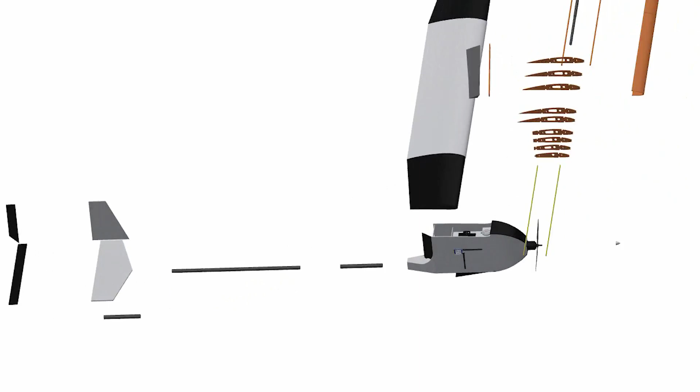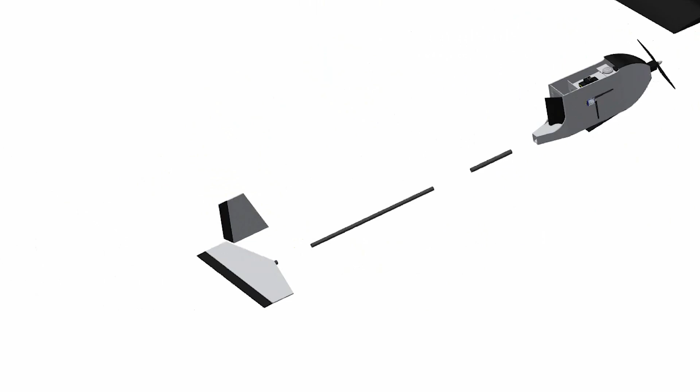We prefer the new tractor configuration rather than last year's pusher one because we took into consideration the speed of wind, as the suction of air coming from the propeller passes over the wing, which increases the speed of airflow for better lift during hand launch.

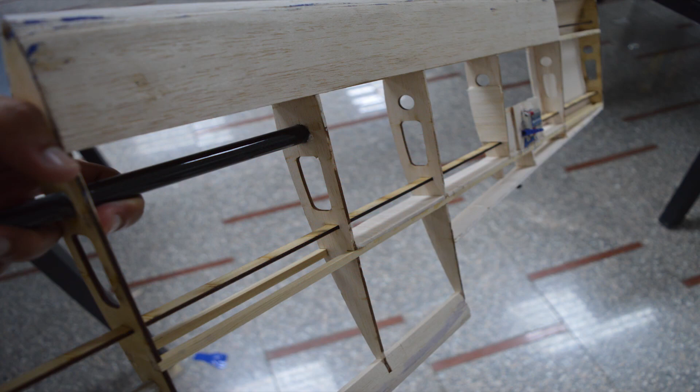During the manufacturing process, the team's main goal was to manufacture the airframe with highest quality and lowest cost, while being sustainable. The main material used is balsa wood and plywood, with super glue and epoxy used to fasten parts. This year, the wing consists of 3 parts for ease of transportation. The wing is made of a spar semi-monocoque structure, where the main spar is made of carbon fiber.

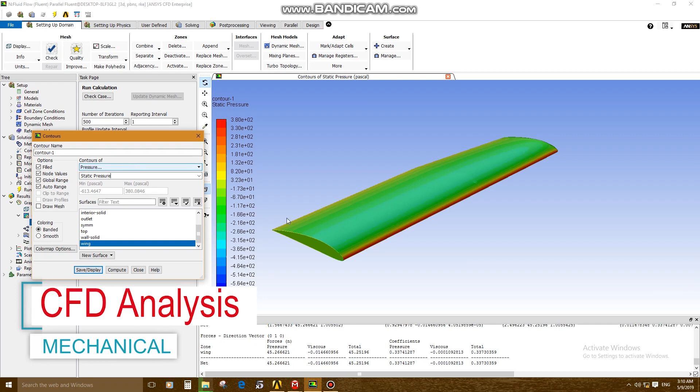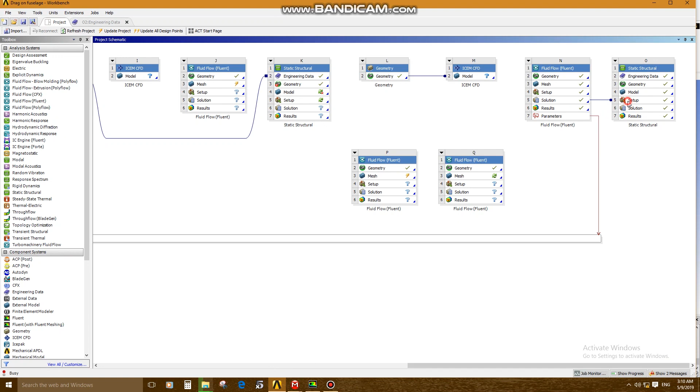Computational fluid dynamics simulations, CFD, were conducted on the half wing to get the results for dynamic and static pressure distributions. The overall lift force on the half wing is 45 newtons, equivalent to 90 newtons on the whole wing, with a lift coefficient of 0.337, which is reliable compared to the XFLR5 software value of 0.236. Finally, the load was imported from Fluent to Static Structural after adding sufficient materials, and the results showed that the wing withstands the load and is safe.

We designed our parachutes using Newton's law equations of motion and making some assumptions to get the net acting force on the parachute, as shown in this table.

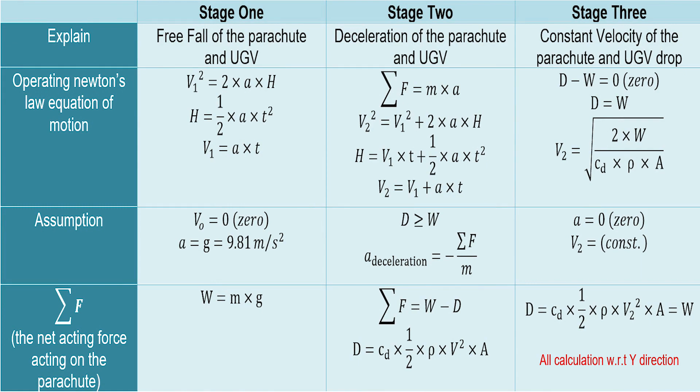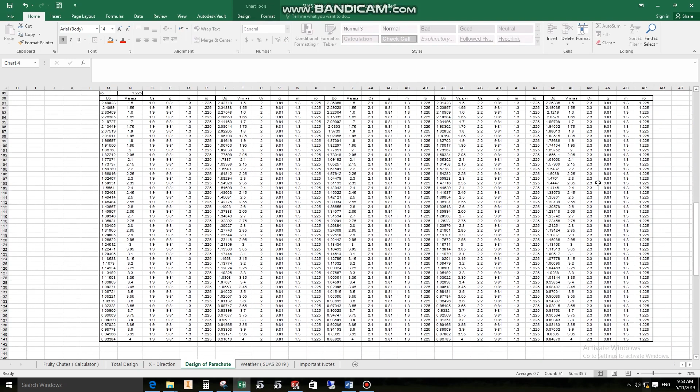Given the parameters of UAV speed, wind speed, altitude, and system delays to our Excel sheet, we got the specifications of the parachute and the optimal dropping time and distance, considered as input data for Pixhawk for their drop command.

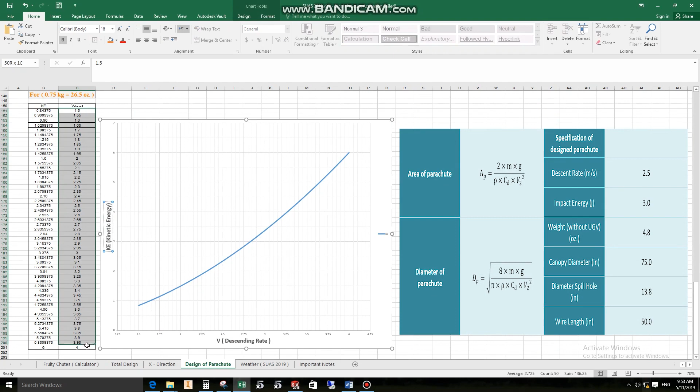A variety of parachutes from different materials and dimensions were designed and tested to choose the most suitable one.

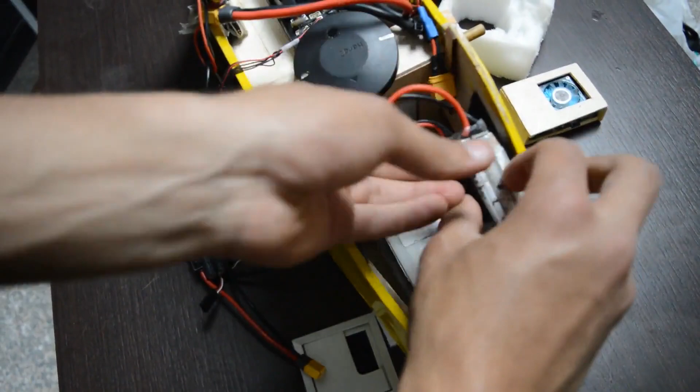For the entire system power supply, we use a 6-cell lithium polymer battery and another isolated 3-cell backup one for autopilot operation, with an electronic speed controller to control motor speed. For safety precautions, power is controlled using a safety switch.

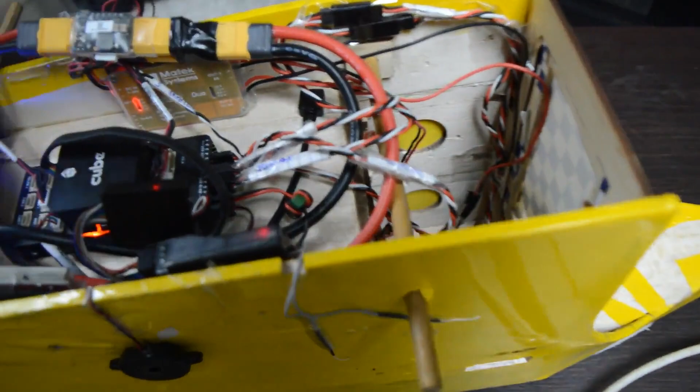We utilize the Pixhawk 2.1 autopilot with IMUs, FMU, and triple redundant sensors, including a GPS module for accurate navigation. The autopilot is calibrated using Mission Planner.

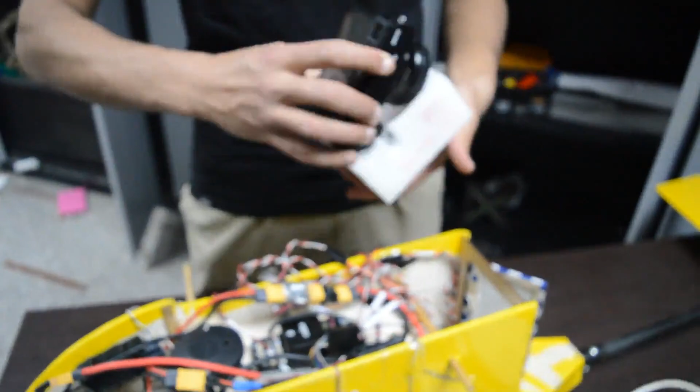We utilize a high-resolution camera, Sony Alpha 6000, which is fixed without gimbal usage, away from the motor to reduce vibrations. The camera is connected to an onboard computer, Odroid, used for image transfer.

Our communication system consists of three major channels. First, the Wi-Fi link, where images will be transferred to the ground station using a Bullet M5S transmitter and NanoStation as receiver, working on 5.8 GHz. The images are sent to ground station operators for manual and autonomous detection.

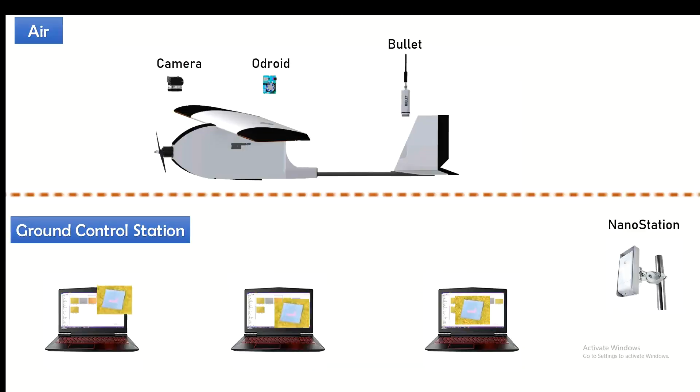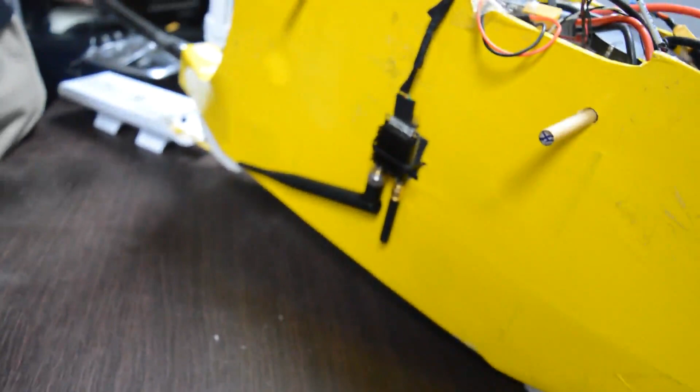Second, the pilot link, where the safety pilot can have manual takeover on the UAV using a Futaba radio control transmitter and Futaba receiver connected to the autopilot onboard, working on 2.4 GHz. Third, the autopilot link: data transmission is done using an RFD 900 telemetry pair working on 900 MHz. That's a brief overview of the entire communication system.

A servo control door at the bottom of the fuselage is used for air delivery of the UGV, which is attached to a parachute for a gentle drop. This mechanism was tested with a dummy weight instead of the UGV.

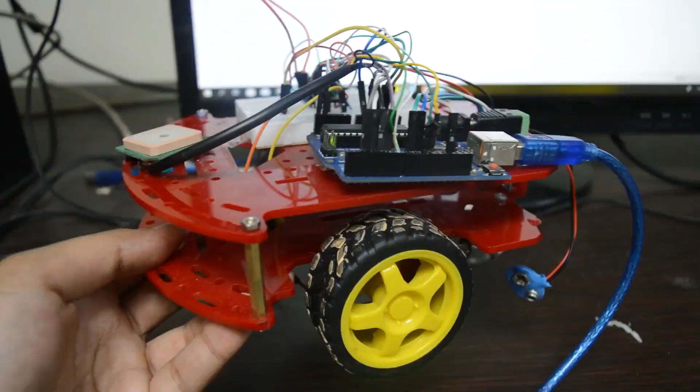For reducing the UGV system components and weight, we designed the UGV with an Arduino system. In parallel, a commercial kit with an APM board for autonomous navigation is used as a backup UGV, which is more effective for the mission. The main trade-off here is the weight.

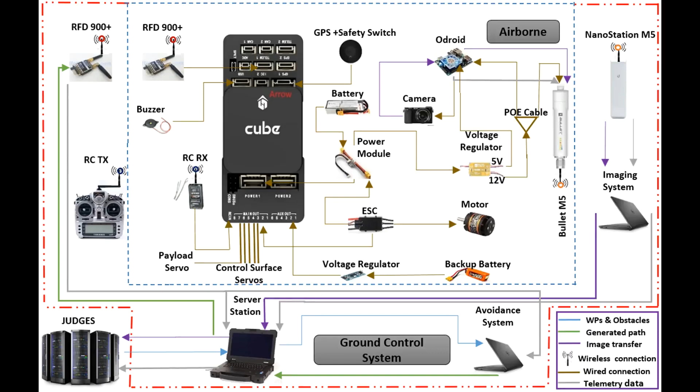The electrical system architecture was designed as shown. Every unit was tested individually, then avionics system integration was done, proving its reliability and suitability with our needs for appropriate flight performance. Now, after unit integration and wiring, our aircraft is ready for mission demonstration.

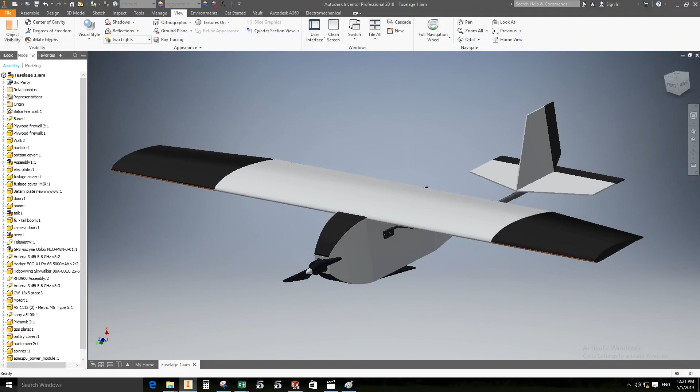Softwares are used by two main groups. The mechanical group utilizes a reliable package of software such as Inventor and SolidWorks, used for UAV CAD drawings, XFLR5 for aerodynamic calculations and stability derivatives, and ANSYS for stress analysis and computational fluid dynamics.

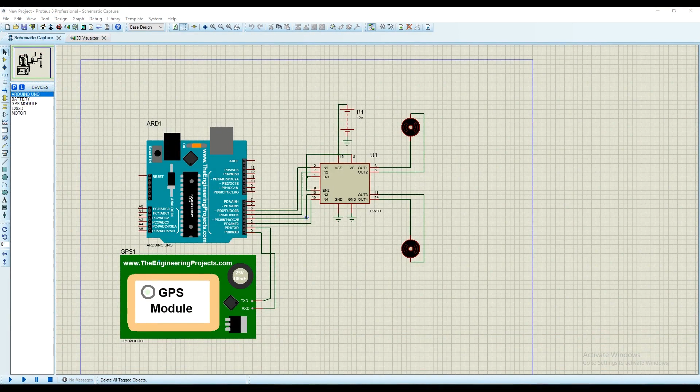For the electrical group, we took advantage of our programming experience by modifying the open source code of the autopilot interface Mission Planner to fit our customized tasks, such as obstacle avoidance. Arduino is used for coding the program to control the UGV. Proteus is used for Arduino connection simulations, and Fritzing is used for PCB designing, utilized in the UGV.

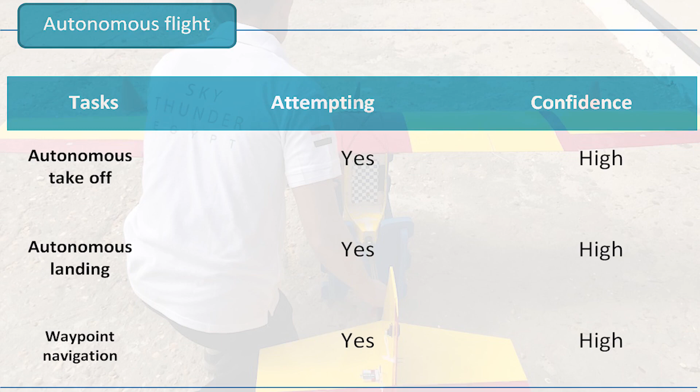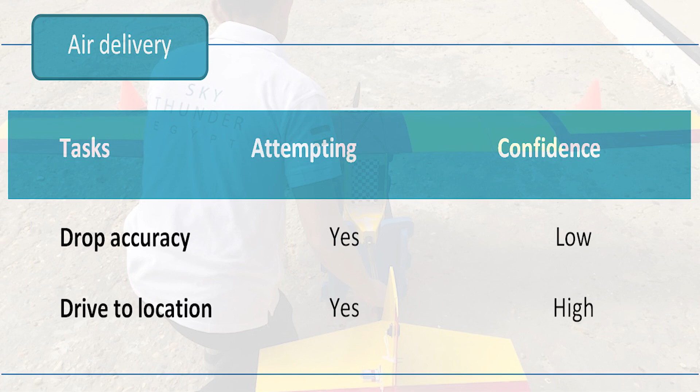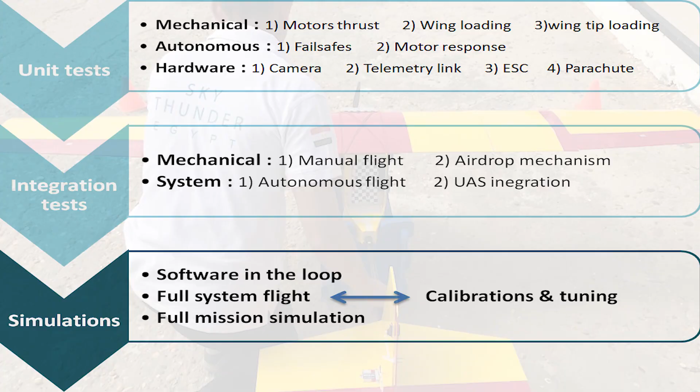According to our team, the developmental tests are unit tests, integration tests, and simulation tests. A load test was conducted on the wing using a weight of 45 pounds to ensure that the structure can support the lift force distributed on the wing. Also, according to Schrenk's method, a wingtip loading test was conducted.

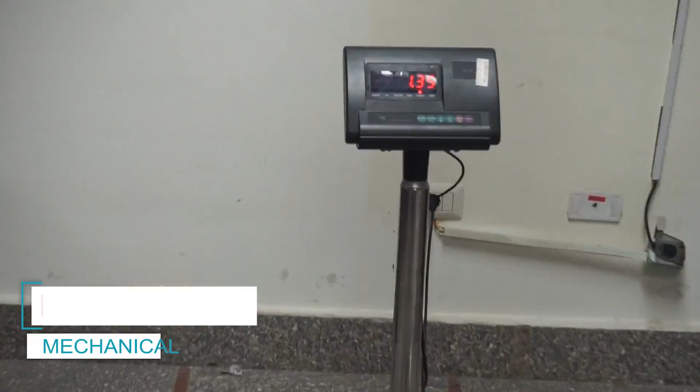A motor thrust test was done in our lab to obtain the maximum possible thrust force. As safety comes first, throttle engaging while doing the hand launch is linked with a certain acceleration value beyond which the motor is triggered. For avoiding UAV steeply climbing while taking off, pitch angle is controlled from the GCS. Manual tuning was preferred over auto-tune mode for higher accuracy, so PID values can suit our aircraft design criteria.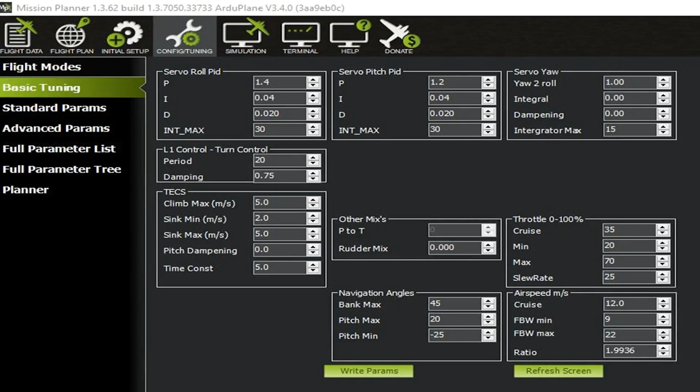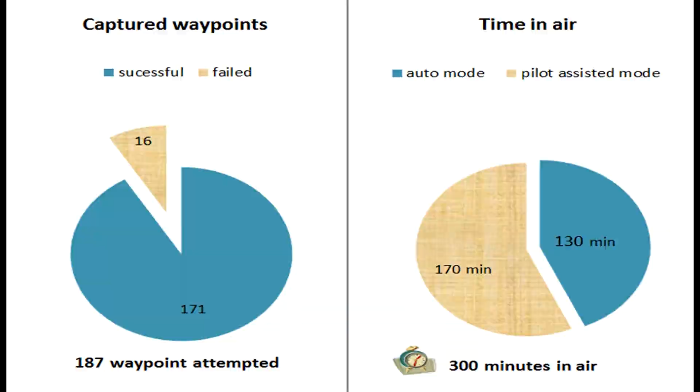Achieving more stable flight, our UAV has proved high waypoint capturing performance by hitting 171 out of 187 waypoints over 15 flights. 130 minutes of autonomous flight has been conducted to ensure mission handling capability. For gentle landing, flare parameters are controlled using Mission Planner.

Taking advantage of our GCS features, we utilize multi-vehicle control by only one station where we can monitor both UAV and UGV at the same time. This feature was then tested in the field and showed appropriate performance after changing the net ID for the two RFD pairs, avoiding interference between them.

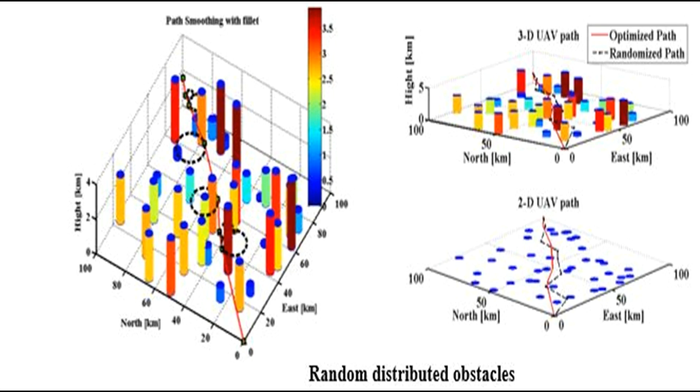RRT algorithm is utilized for path planning and modified to fit with obstacle avoidance task, then implemented into our obstacle avoidance program, which generates an obstacle-free path with tolerance 20 feet away from the obstacle boundary. Python script, including DroneKit library, is utilized for the connection with the autopilot, flight data transmission to the avoidance program, and uploading the generated collision-free path to the autopilot.

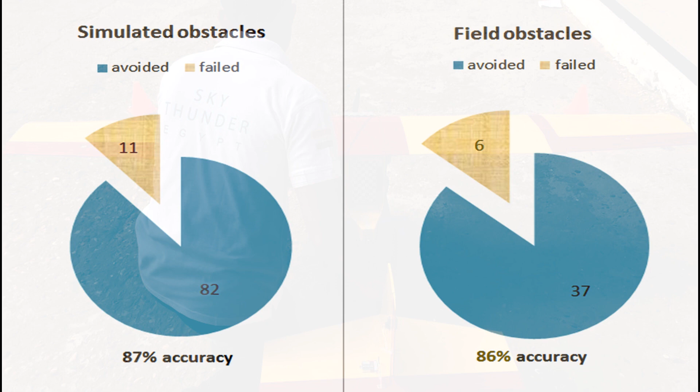We modified the open source Mission Planner to fit our needs so we can monitor a real-time stationary obstacle avoidance with a dual visualization of the old given path and the generated path. 93 simulated obstacles were tested, avoiding 82 of them, giving an 87% accuracy. In the field, 43 obstacles were tested, avoiding 37 of them, giving an 86% accuracy.

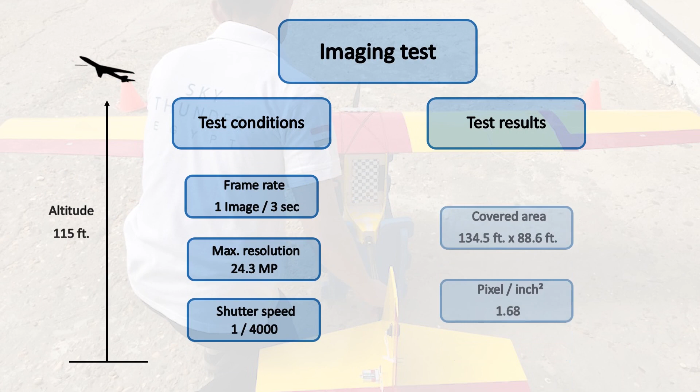First, we did unit tests on the imagery and communication system, where we tested the process of sending and receiving images on the ground using Bullet M5 and NanoStation. Second test was an integration test during a flight at 115 feet altitude, and the results were a field of view of 134.5 times 88.6 feet along with 1.68 pixel per square inch.

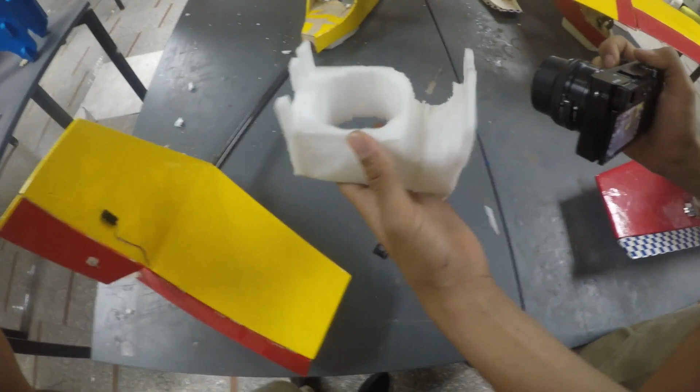For ensuring the best image quality, the team's strategy was to build a lightweight mount of foam to the camera, which is located away from the motor to reduce vibrations that may affect the shutter speed and avoid image blurring. Furthermore, a suitable frame rate with the UAV speed was used for not missing objects.

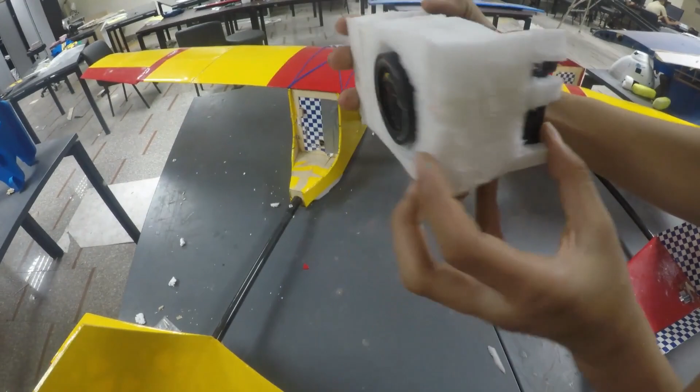On the GCS, a team member will be in charge of detecting objects and determining the characteristics manually to ensure the best coverage of objects.

We tested our algorithm on 50 geotagged objects over 5 flight tests. A mobile was used to detect the accurate latitude and longitude of the shapes, and then they were compared to those resulting from our geolocation algorithm, and the average error was 40 feet.

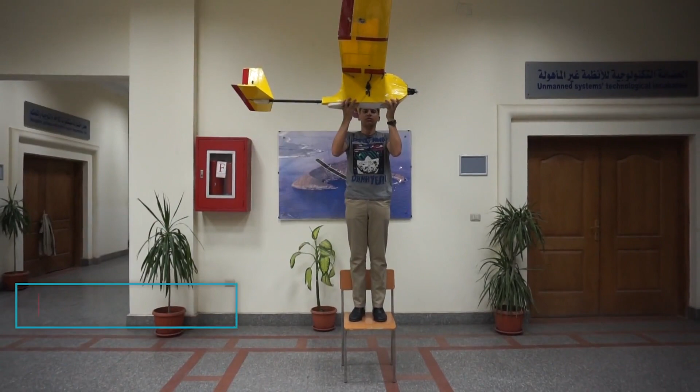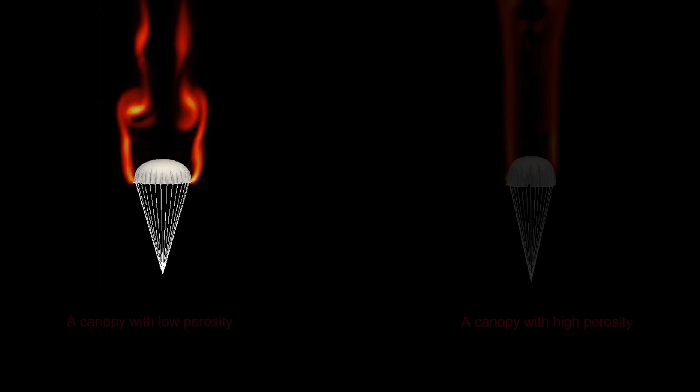A unit test using a dummy weight on the dropping mechanism was done to check the servo response to Mission Planner commands. For integration, actual drop tests were done to check drag coefficient and material fabric of parachute, along with a simulation test to find the suitable air permeability.

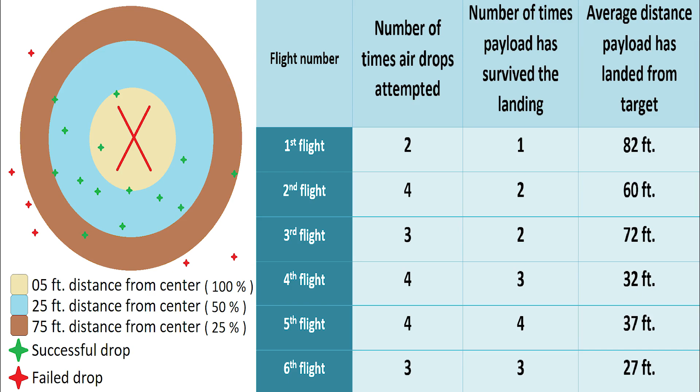Consequently, many tests have been done, and here are their results. The team worked on controlling the UGV for the drive to location task using Arduino and autopilot systems in parallel to use the better in performance.

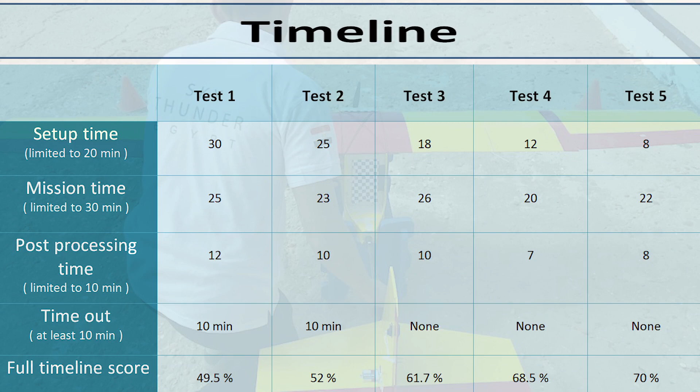The improved performance of NISR at every flight test really shows that we are capable of getting a higher full score than 60% at competition.

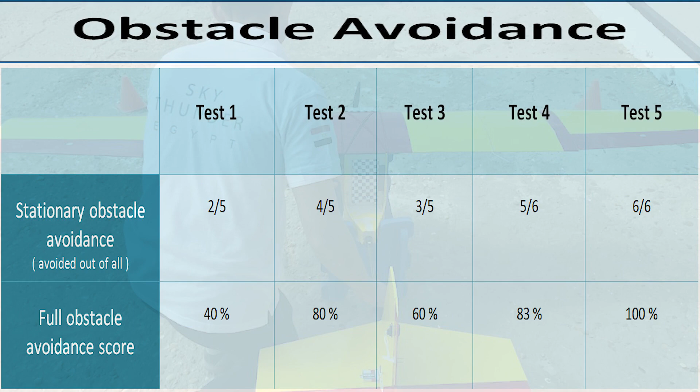Finally, we will show the flaws that have faced our team members and the corrective actions that have been taken.